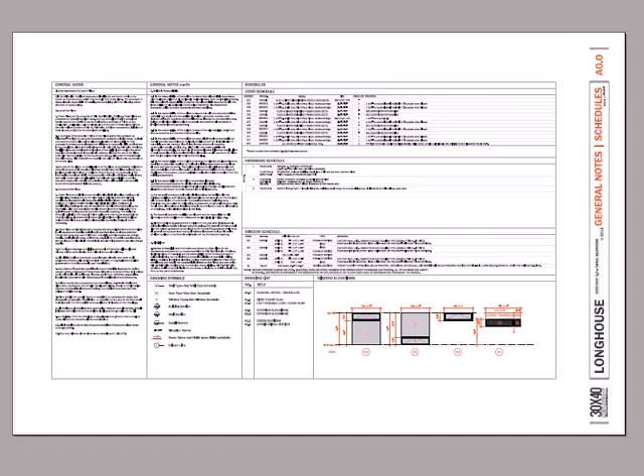The windows and doors are selected from the Marvin catalog, current in 2014, and their standard sizes, so they should be pretty economical. Page 3 gets into the floor plan.

The basic difference between the 2-bedroom and 3-bedroom, aside from the added bedroom, is the length of the plan. We've taken the center dimension here, the living space, and stretched it out on the east-west axis, so you have a little more space. That provides a little breathing room at either one of these entries.

We've added a powder room and an area for laundry, tucked away in a closet, which can double as a clothes hanging closet. We have an area for pegs along here. The kitchen space is open to the dining and living space as well.

The master suite sits on this end of the plan, and we've subdivided the Dogtrot guest end into 2 bedrooms with 2 baths at either end. It is possible to make this one single bath, and I do have some plan layouts for that - if you're interested, just email me at eric@30by40.com.

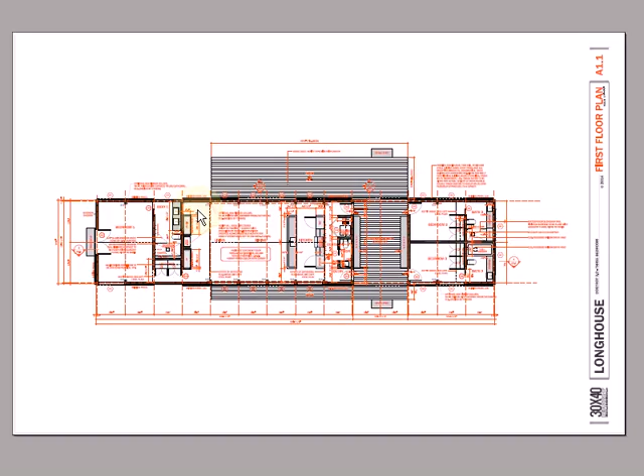This is a fully annotated plan. It lists the window types, the dimensions, sizes, partition types, and keys all the door and window references back to the schedule on the previous sheet.

There is an option here to vault. You can see in these open white areas in the plan, you can vault these spaces depending on what the structural engineer comes up with for engineering.

You could equally truss these spaces and have flat ceilings in here. The vaulted spaces will require either exposed truss work or a ridge beam and some exposed rafters.

All that's very possible. In these end bedrooms, it's kind of nice to have this - you can see this shaded area, these storage lofts. The storage lofts then have skylights above each one of them to let light in. They're not legal sleeping spaces, although they could be converted as such if you add an egress window and a legitimate access point.

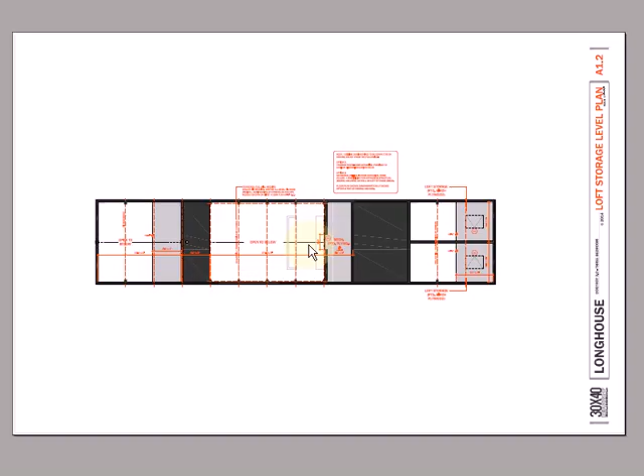Our mechanical space sits up here, accessed by a sliding panel. Pretty minimal - there's minimal mechanical equipment required for this.

You can do this as a passive house design, where this is a slab on grade. You could do it as a full foundation if you want the basement space, or it could be done on frost walls very minimally, in which case you could place the mechanical space in the basement.

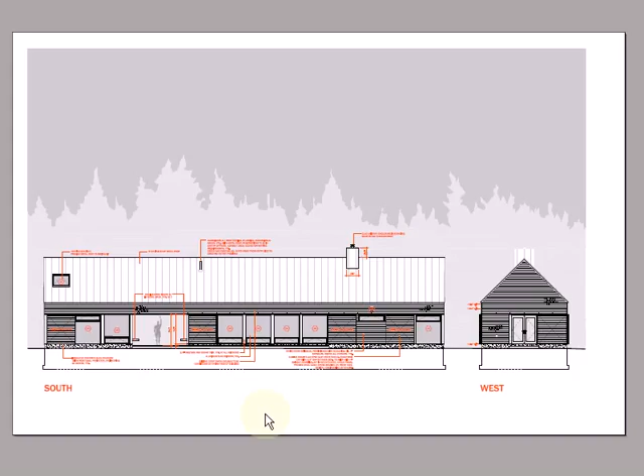Opposite side elevations here, south elevation with the large deck opening up to a view or the sun, and all of our different window configurations.

This is fully annotated to talk about materials, types and configurations here. Master bedroom has a couple of French doors, and again the slider configuration here.

We move on next to page 7, the cross sections, and there are 3 cross sections here. One's through the Dogtrot, and then there are 2 versions which describe the truss layout. You could truss the roof here as I described earlier, or you could vault the living space and use that added volume to make this small footprint feel much larger.

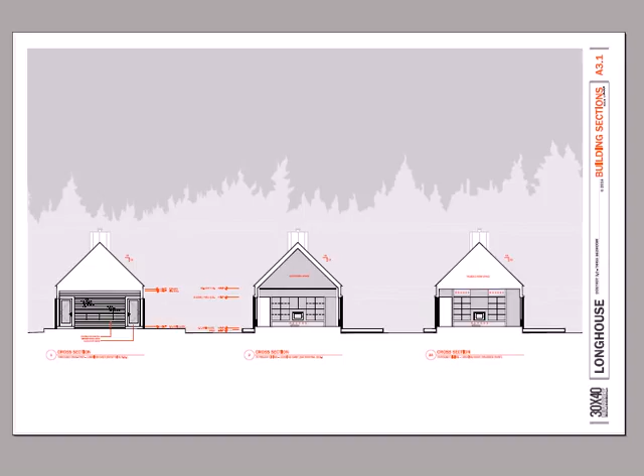So that's our 3-bedroom Dogtrot. If you have any questions...